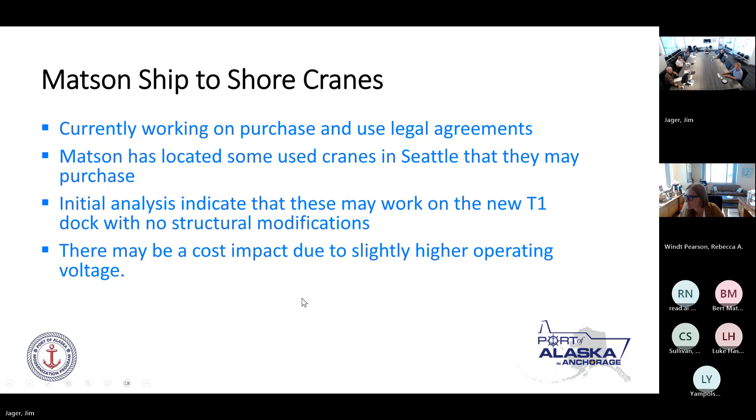So I can take this one on, and we're bringing these to this group because we're not asking for any formal decision, but they're informational because they may require that in the future. So we were looking for a location for the stevedore building. We found one that everybody liked. We ran it through the designer of record and the contractor, and it turns out the cost for deep soil mixing to support that location is higher than we thought. It was $10 to $15 million to do the ground improvements; the building itself is $4 to $5 million.

So it's kind of saying we can't really do it. So now we're back to the drawing board and we're looking for another location. The issue is wherever they put this, there needs to be parking and pedestrian access to the dock without running across truck lanes and things like that as little as possible. So it's a bit of a challenge, but letting you know that we're back to the drawing board. It's just an informational update.

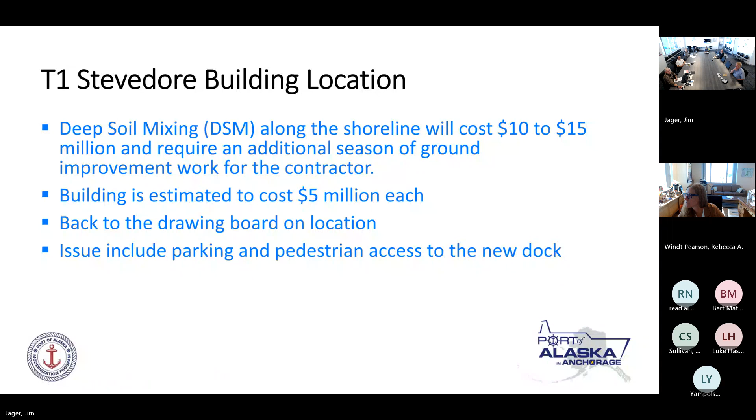That gray box there shows the ground improvement area. They were originally going to put it south of the south access trestle. It's a nice location, lots of room for parking, easy to walk to, but the shore isn't stable there and making it stable is very expensive. So the question would be, is the assumption that the surrounding area is the same way, all of that on the shore there? Yes, same issues.

Basically, we need ground improvements for it. So what other options are there? Maybe moving it over to where the yellow box is dead center, near the POV. We're not sure, but away from the edge of the slope, basically back in the uplands more.

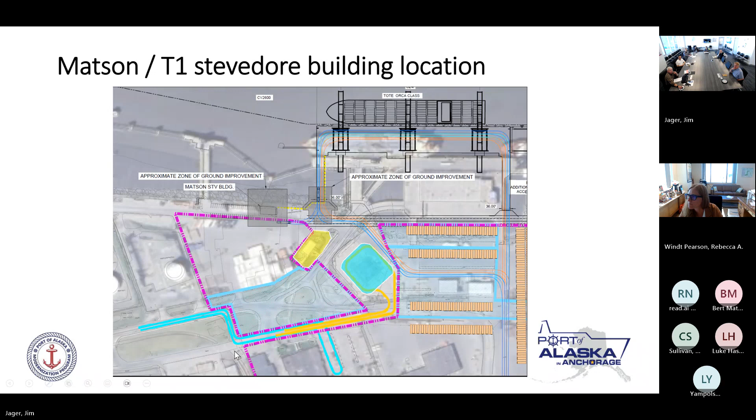Next slide, please. Okay, go ahead. And just as a reminder, this is theirs. We're not seeing the slides. Or I'm not anyway. I'm sorry, there it is. Never mind, sorry.

Okay, so this is the current configuration. The red lines on the left are Matson, the green lines on the right are TOTE. The area right in the dead center is the yard that Matson currently uses, which is one of the issues: as they move south, what happens to that yard?

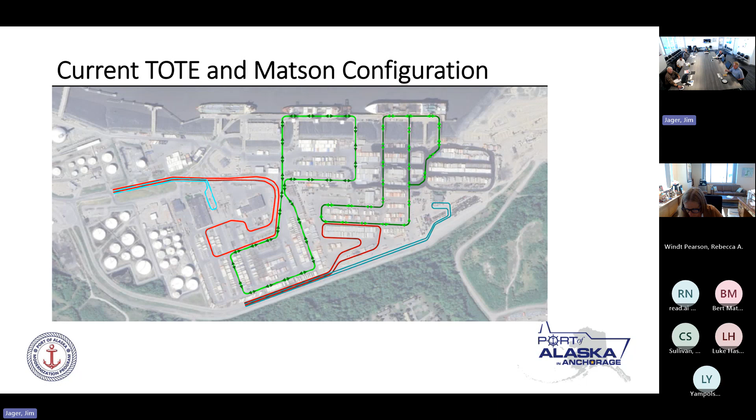Next slide. This is just a reminder of what the issue is. This is the permitted future condition with the dock lengths remaining as designed. If Matson keeps control of that center portion of the yard, then TOTE has to go around it. It becomes an island that requires a right-hand turn, makes it a little awkward. So that's the current condition if we don't modify anything.

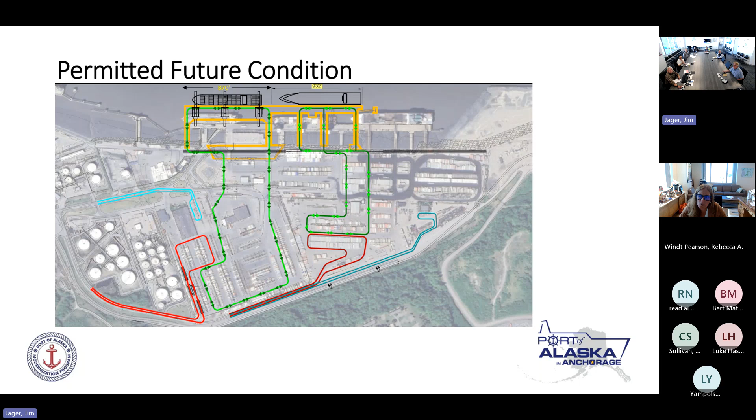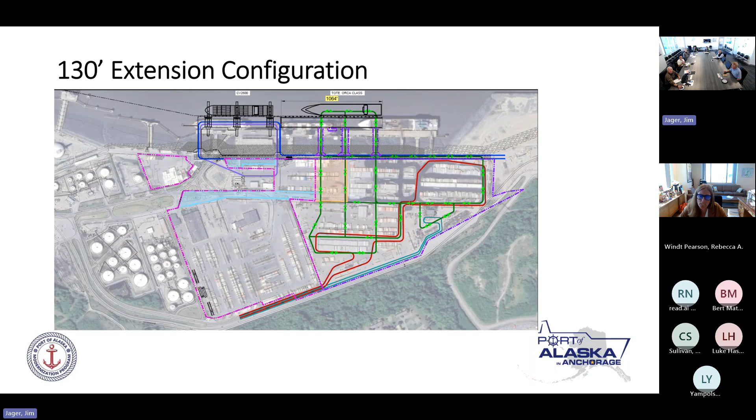Next slide. And then this is what we came up with as a solution to that, which was to extend the dock slightly and reconfigure the boundary line. That makes everything happy except it requires a longer dock extension, which is expensive.

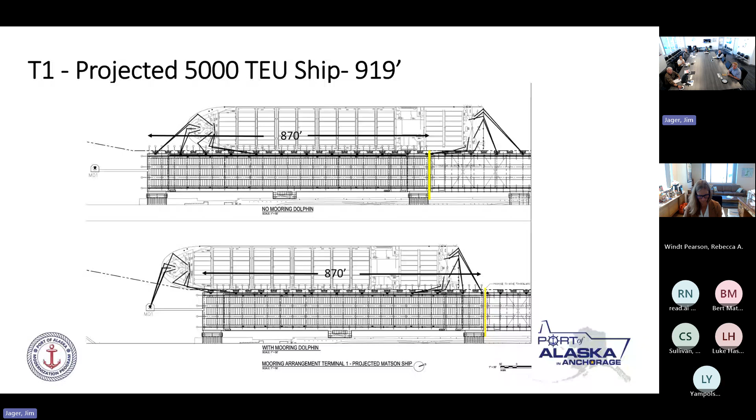Okay, next slide. This was—so back up one second. Just to also point out, because that was a big topic of discussion last time, we did meet after the PAB meeting with Moffatt & Nichol, the port, TOTE and Matson to discuss the issue at hand. So at this point, we're waiting on Moffatt & Nichol to come back with some input on yard layouts, if I understand that correctly. And they're waiting for this change, for this August 26th, right? So I just wanted to point out that we've also been having discussions on that subject.

Jim, quick question. Maybe there'll be a subsequent Moffatt & Nichol study to show what's the best we could do with the as-permitted option. I think maybe it's an item of note when presenting it in the future. It's a landside issue, and then also your previous slide of just T1, T2, and the landside issue. But I think we should talk about it comprehensively versus just the issue with the landside, and then moving on to T1 might need to be extended as well, because in a comprehensive view, I think we can take a better stance on it than just one issue at a time.

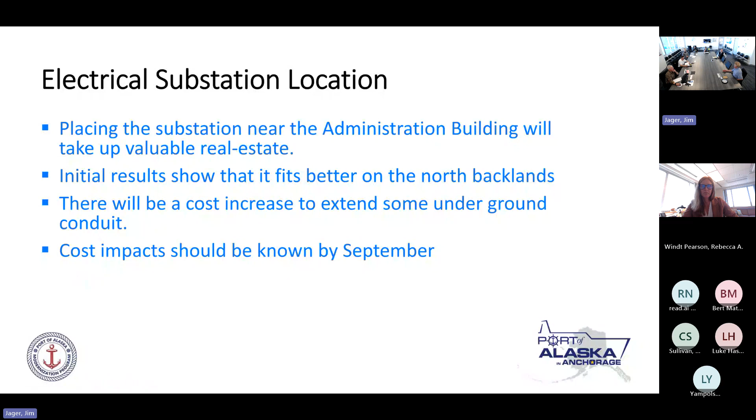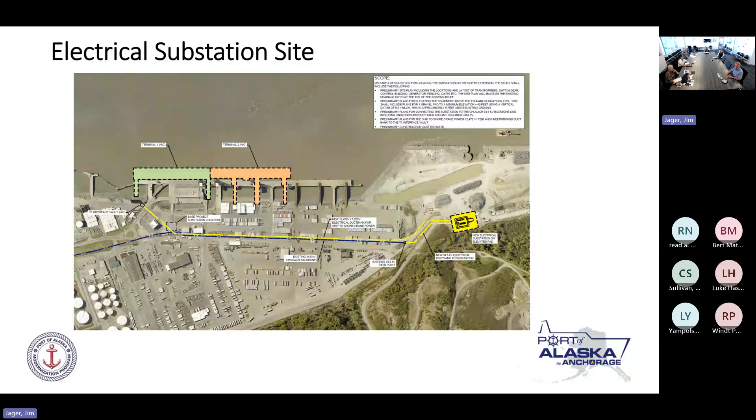Okay, next slide. So here's a new one for you: POL2 condition. It turns out that once we start looking at schedules and tearing down POL1 as part of the T1 construction, that leaves us with two POL docks, POL2 and PCT. We've done a fair amount of work on berth occupancy and need, so we know we need these two.

This spring, the CP guys went out and did their annual CP survey, and got under the dock and found some damage to one of the pile caps. I'll show you some pictures of that. We'd also done a low tide inspection early in the spring to look at the piles and fenders, and it kind of hit us all of a sudden that there's a lot more than one thing going wrong on POL2.

So this is a list of all the different things going wrong on it. The hydraulic crane needs to be replaced. The rubber fenders are falling off and need to be repaired — we have a project to do that. Some of the fender pin piles have buckled and corroded, and we don't have anything to fix that yet.

Many of the main dock piles have corrosion holes in them. We fixed some previously, but there are new ones now. The CP system isn't working as well as it should, and then we now have this pile cap issue. So where we're going with this, we're going to start a project to do a more detailed evaluation, and it could have some impacts on things going forward.

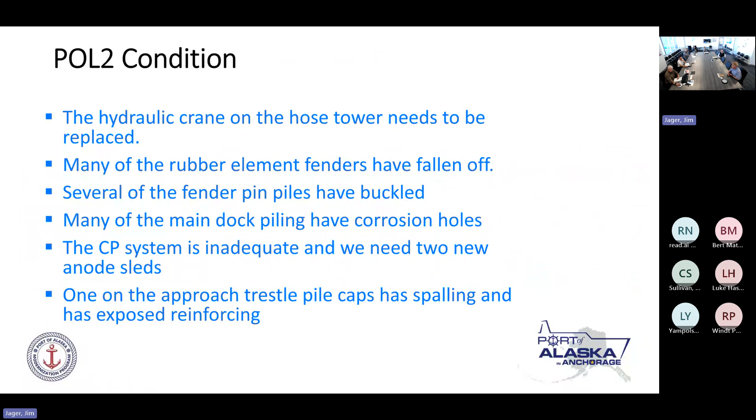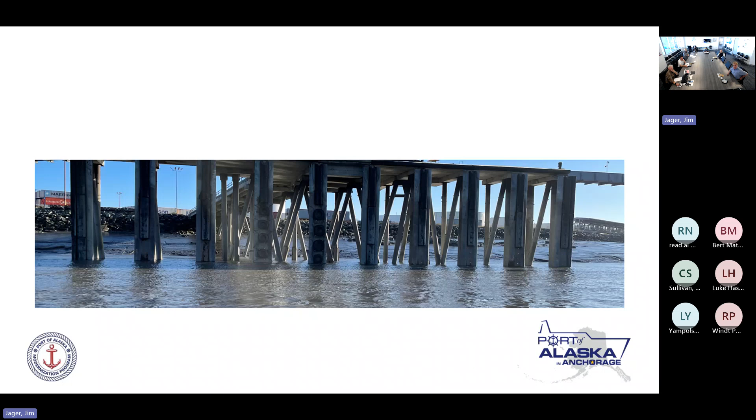Next slide, please. This is a picture of the fenders. If you look closely, you can see their cylindrical, side-loaded fenders; some of them are missing. This is at about mid-tide. Actually, we had some tires chained up in places, but there are quite a number of them missing — they need to be replaced.

Next slide. At the bottom of this image is a fender with a missing rubber element; you can see a little piece of one at the top. And then at the bottom, where the sleeve hits the pile, it's buckled and broken — the piling at the very bottom that holds up the fender is damaged. Those probably all need to be replaced.

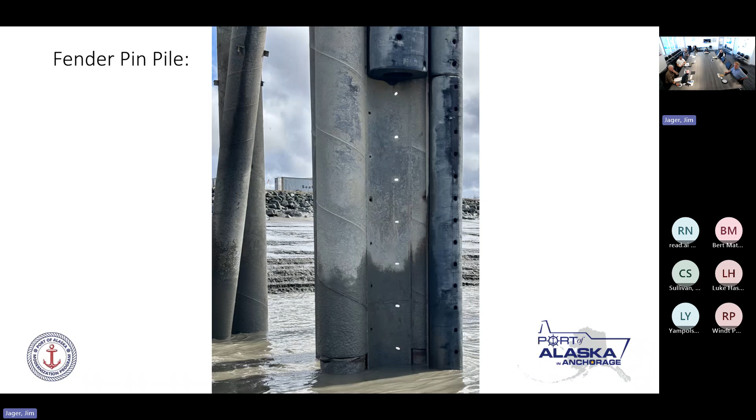Next slide, please. There's a close-up of the damaged pin pile that's holding the fender up.

Next slide, please. This was at low tide. These are spiral welded pipes; the weld area corrodes preferentially to the base metal, so it goes away very quickly and becomes concave. If you look at all the welds, especially below the low tide line, it becomes really obvious, because when the tide is high, the water ingresses into the pile.

When it goes out, it releases water and it pees. So we look around at which ones are peeing. There was, I don't know, 4 or 5 of them this time that were peeing. Every year there's a new batch of them.

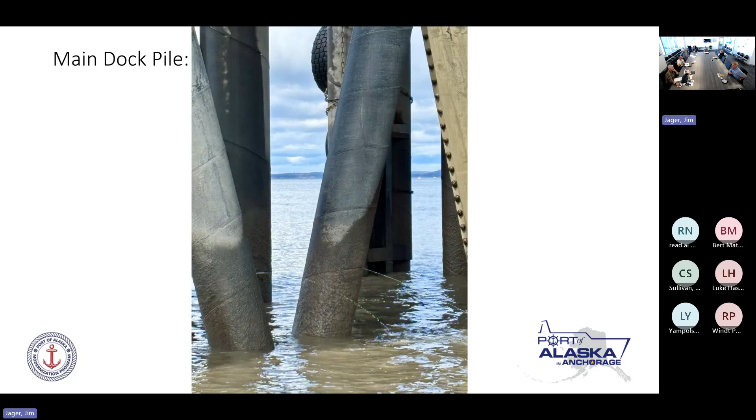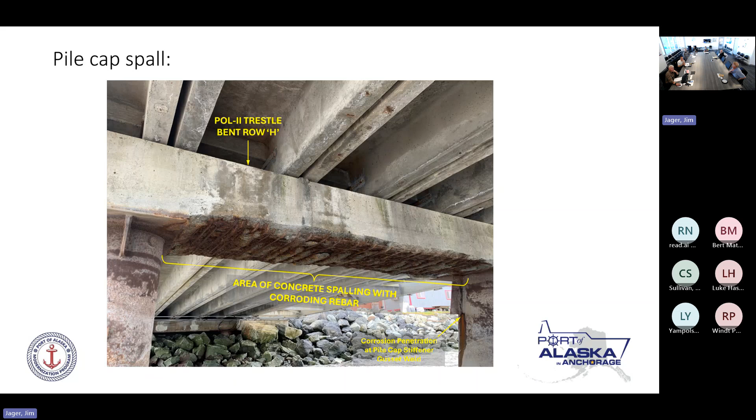We don't think that's what you're seeing here. You're not seeing the pre-stressing strands, but it makes you worried. Next slide, please. That's a close-up of the corrosion that's happening there. Next slide, please.

So it's kind of what we just said. The cost could be 5 million or more to keep this thing alive for another 10 years. If we start on it now... if it goes out of service, it has very serious impacts to the port because POL1 will be gone. If this goes out of service, then we are down to 1 POL dock, which is kind of alarming.

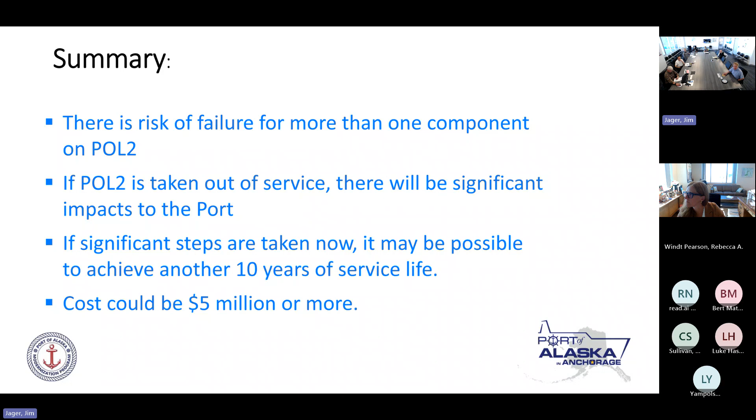Next slide, please. So our action item is we've solicited proposals from our consultants to do a condition assessment and a structural load rating. Those are 2 different things. The condition assessment looks at the whole dock, all the different parts and pieces, and writes a report. How are the fenders? How are the piles? How is the deck? How is the crane? The whole thing, just a big report about the whole dock.

And they'll list all the things that need to be repaired. The structural load rating looks at that pile cap and tells us, is it safe to drive on that, and how do we need to repair it. Right now, we're a little worried because we'd like to go fix the fenders, but we don't know if we can drive out there or not without falling through the dock.

So, we got that proposal in hand. We're trying to figure out how to contract it. We might need a change order authority to do that through our Michael Baker.

Do you have a question, sir? Yes. What's the timeline on these items?

Well, that's a good question, Bert. We're working as hard as we can on it. We're probably going to have to get a change order to our term contract in order to advance this. We're out of money on that right now. We've used up our total budget for that. And so we're probably gonna have to go back to the assembly and get change order authority increase, I guess is the word, to do that.

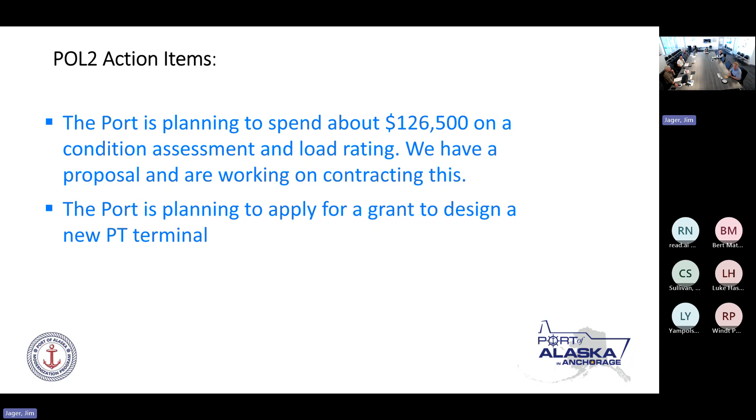Okay, T1 status and temporary facilities plan - this is another item on the agenda. So for T1, much of the steel plate has been ordered for the piling, and procured. There's a series of early payments that we've given to the contractor to pay for all that. The piling are being fabricated now in both Texas and in Anacortes, Washington.

In Texas, they're spiral welding some of the 1-inch plates for the bottom - 1 inch is as thick as they can do with that, so they're producing some of that down there. The rest of it, the thicker wall stuff, is being rolled individually in 10-foot sections in Anacortes.

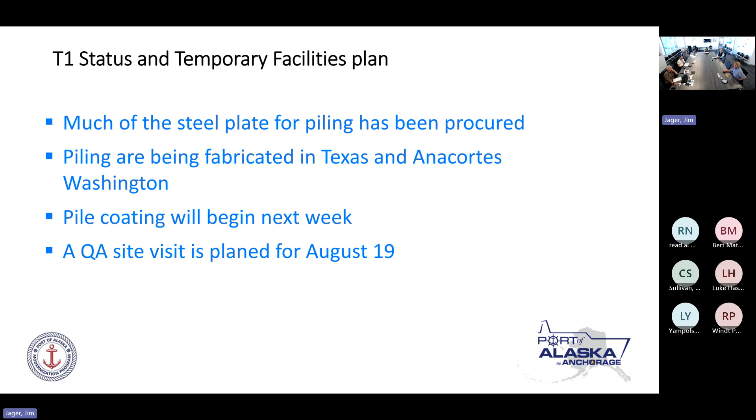The pile coating will begin next week, and there's a site trip down there for a number of people to kick off the QA services of the piling. There'll be a lot of pile down there, a lot of coating, a lot of materials. We're going to have a few folks from here go down, and then there'll be at least weekly inspections on site to monitor what they're doing. So they're fully underway with fabricating the piles - that's the status of that. Next slide.

So some of you attended the construction user outreach meeting that Manson provided. They went over their plans for access and what it's going to look like out here next year when they start the site work. It's going to be quite different. There's a lot of disruption that's going to happen. It's going to be a fairly large construction project.

There'll be a fence line, transportation corridors, all that. They went along and discussed all that. It's going to mostly affect Matson with the T.

It's so hard to say Manson and Matson. I get all tongue tied. And then we put Mason on the slides. Oh, nice. Just to really confuse them. Yeah, that's a little dyslexic thing shown in there for good measure.

The military will also be affected because currently they use our yard out here for their helicopter operations. So we've had meetings with the users and the military to talk about all this. Frankly, we have a little bit more homework to do to figure that all out, but we started down that path.

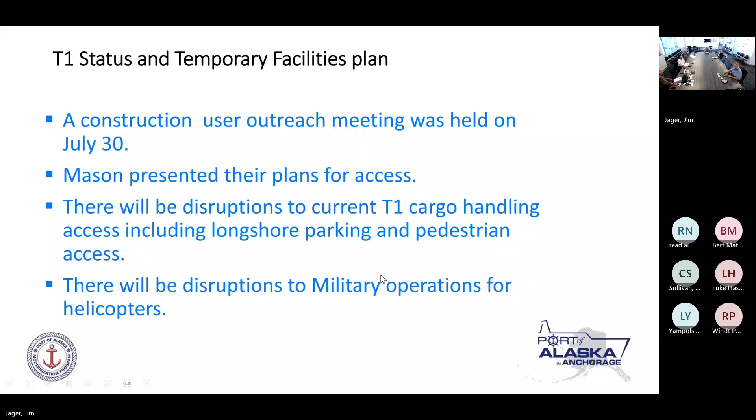So we've got a number of alternatives for longshore parking and pedestrian access. Right now, they park primarily on the crane turnout. That may or may not work. It's not going to work in the long-term future. It may work temporarily. Matson with a T or Manson with an N identified that as a possible trucking route. We haven't firmed that out yet, but it might be a truck route for access to the container cranes during ship day.

So the worst case would be for the longshoremen, we'd have to find a distant place to park and then bus the workers to and from the dock. That's a fallback if we can't find something closer. I think TOTE is doing that in some cases now with their operations, so it's possible.

Then for the military, we had one meeting with the military. We're trying to schedule another one, but we're looking at paving an area on the north end and making a little access road so that they can land helicopters out there. And we may have MARAD funds available to cover part of that. So we're exploring that.

But basically, we have a little bit more homework to do on getting ready for heavy construction next year.

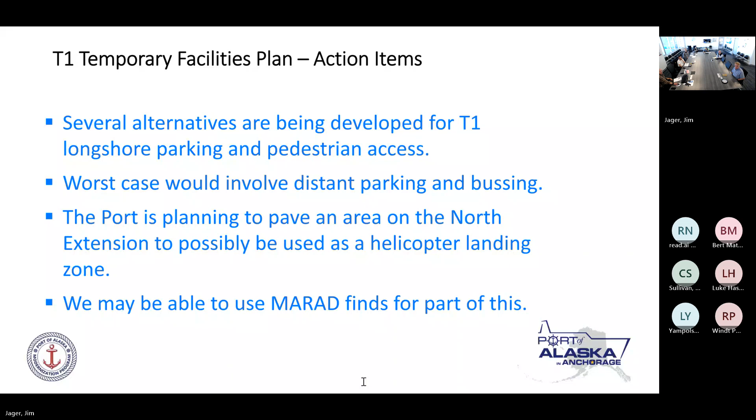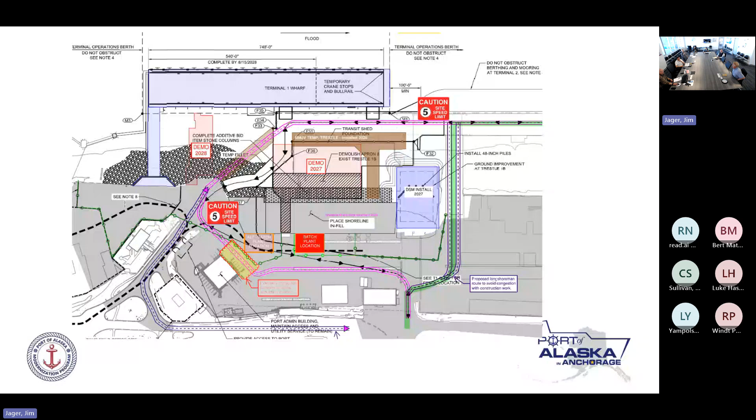This is just a close-up view of the previous slide, so you might be able to see it a little better, but there's an awful lot going on in there. We're asking Manson for at least one more public meeting where they can go over that and talk about it all. The interesting thing is no matter how long you stare at this, it doesn't really become real until you see them out there with an actual fence and a crane and backhoes.

And then it kind of hits you right between the eyes. Oh my God, this is real. They're taking up all of our space. And we want to minimize the shock of that by talking about it up front.

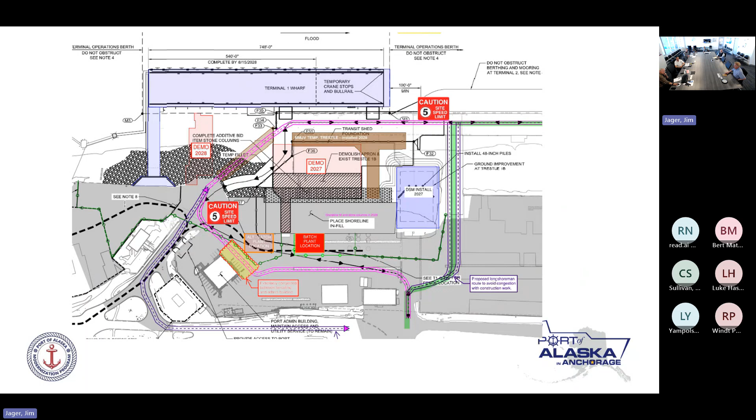The meeting's the week of the 25th. Okay, next meeting, so you guys will get the invite. We had some internal meetings and we're going to try to meet with Matson with a T and talk about some options.

So this is about the north end, and the green text where it says NEPA boxes. It turns out that in order to spend federal money, we have to have a NEPA associated with it, the National Environmental Policy Act, which is a permit. So the only thing left after they're done demolishing and rebuilding NES 1 are these two boxes.

Those were put in the original plan. One was for a potential area for contaminated soil. The other was the stockpile area for gravel. The gravel area is being used. There's a giant pile of dirt there now that's going to stay there for a couple of years until we find a home for it.

So the NEPA box on the right was set aside for contaminated soil. There is a permit for it, so we could use MARAD funds to pave that and then pave a road from that back to near Terminal 3 for a helicopter landing zone. So as part of our homework assignment, we have some extra federal funds and we're going to try to do that.

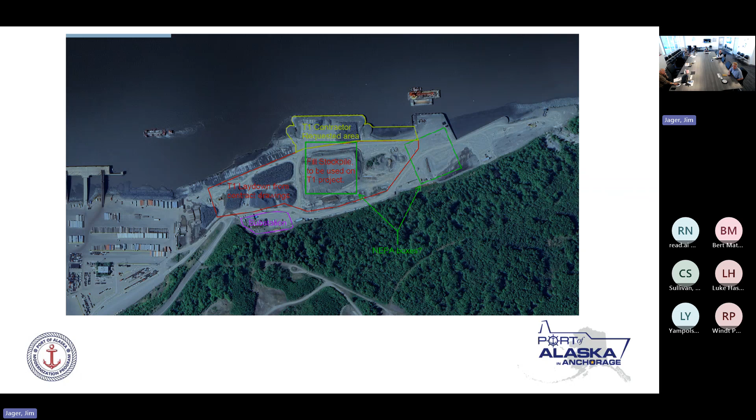Slide. Maybe that. That's it. That's all I had. And I don't think I got all of Bert's.

So we'll go ahead and cover that now. Just an update on the POVI stripping line, which was one of Bert's items. So the POVI stripping line is on the agenda for tomorrow night.

It will be approved by the assembly. And Udelhoven has the contract and change order to do that work, and they're standing by waiting on approval.

Just so I'm clear, does that also include the issue with how the fuel gets diverted in? That is exactly what that is. That will be the POVI jumper.

And associated with that, there was also some question about the emergency shut-off valves. We have tested and are satisfied with the performance of 5 of the 6 emergency shut-off valves. The 6th one we did not test because of risk of cross-contamination. As soon as the stripping line problem is resolved, we'll be able to test it without that risk. You can actually avoid the risk with the right procedure, but you have to do everything just right. Once we fix the stripping lines, that cross-contamination risk goes away. It'll take a couple hours to do the test and we should be good to go. We have no reason to believe it doesn't work, we just haven't tested it because we didn't want the risk of cross-contamination.